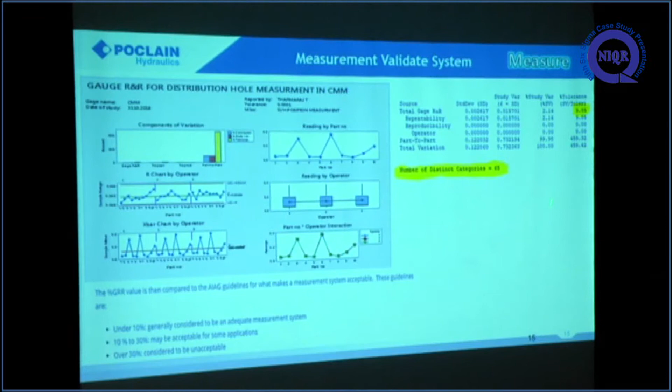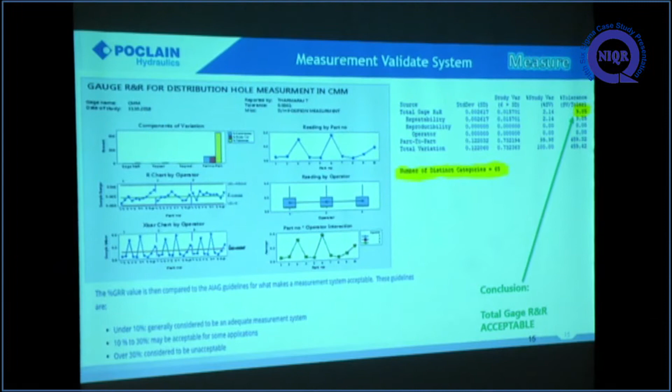This is the measurement phase. First, we did the MSA studies. Actually, we are inspecting this only in CMM. We did an MSA study with 3 operators and 3 levels, and the R&R percentage is 9.85, and for NDC we achieved 65. So the conclusion is gauge R&R accepted because it is less than 10%.

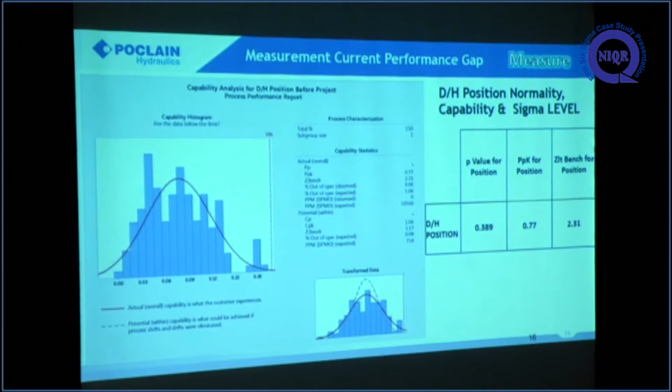And measurement of current performance: we are measuring where we are against the capability. We are checking the normality study. The p value is 0.389, and PPK of 0.77 is observed, as well as Z.LT long term capability coming to 2.31. So this is the fishbone diagram.

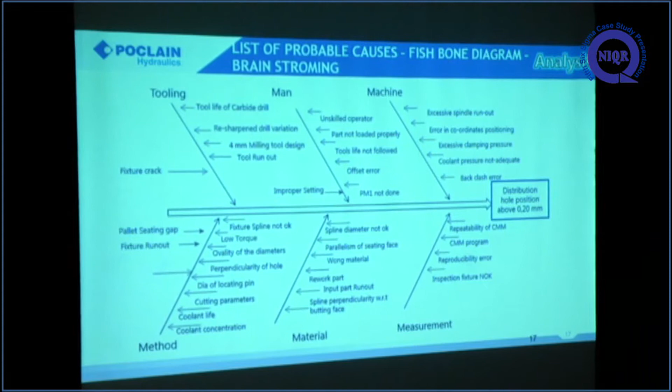In the fishbone diagram, we are capturing the measurement, all those things. Based on that fishbone diagram, through multi-voting, we are addressing the potential causes from those things to here. I'm giving to Mr. Ayappan for the next slide.

Here we have identified potential causes. One is improper setting, resharpening drill, variation, pallet seating gap, fixture crack, fixture runout, input part runout.

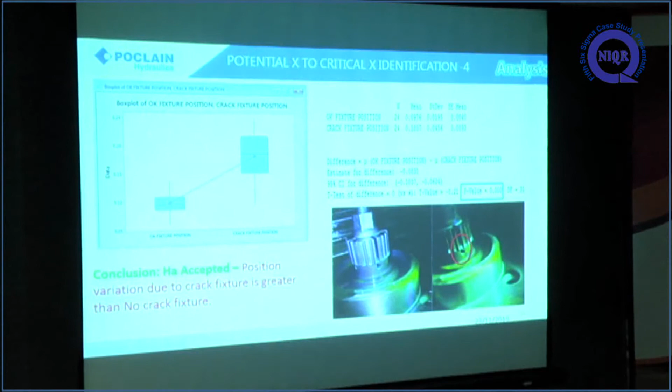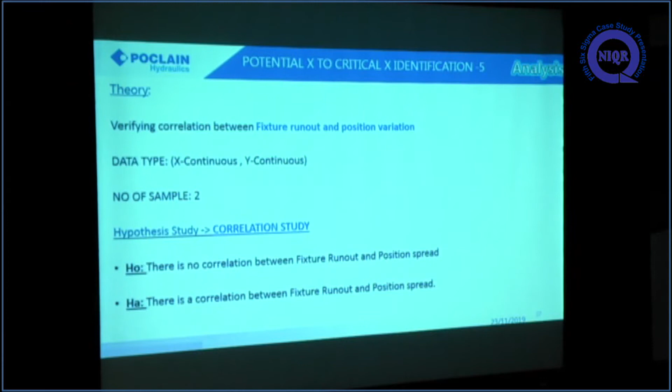Next slide. So position variation due to crack fixture is greater than OK fixture. Here we have taken a correlation study between fixture runout and position variation. The p-value is higher, so there is no correlation. So we have accepted no correlation.

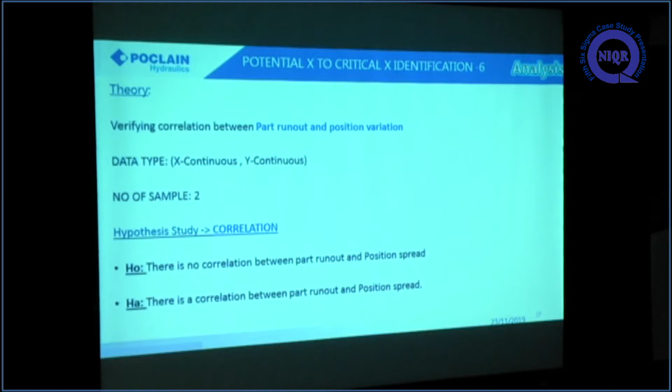Here again we have taken part runout and position variation correlation. H0: there is no correlation between part runout and position spread. Alternate hypothesis: there is correlation between part runout and position spread. Here also there is no correlation.

We validated 4 critical causes out of 6 causes. So to improve the distribution hole position, we need to act on the vital causes we identified. For improper setting, we did brainstorming with the team, and we selected the solution: a setting change check sheet and a setting change variation control fixture.

For drill variation, we did creative thinking by probing, asking questions to the team: can we minimize the impact of certain aspects? The selected solution was that drill radial runout control can be included for verification of resharpened tools. For the fixture crack, we benchmarked with other internal machines. The selected solution was a Hainbuch fixture. This is deployed and used in other HMC machines 2 and 3.

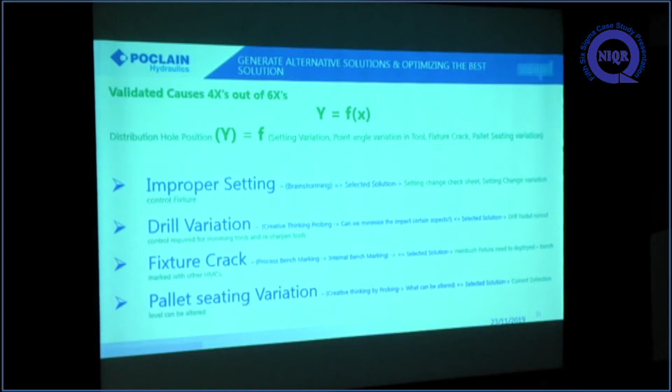For pallet seating variation, we did creative thinking by probing: what can be altered by this process? The selected solution was that the current detection level can be altered. Under improper setting, we made a reference block for setup of size 2 and size 5 block. This will avoid setting change rejections, rather than using two different pins, which gives more variation. Now this pin is connected once the setting is done.

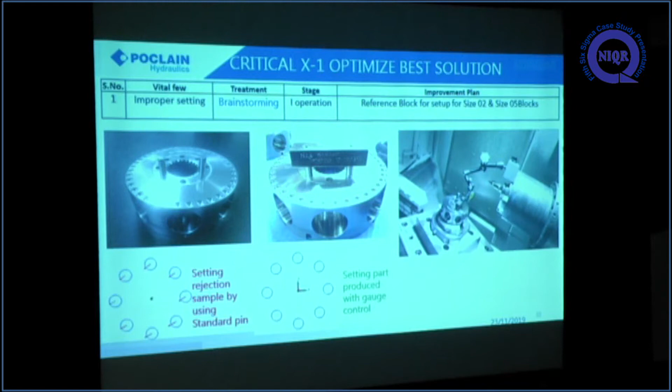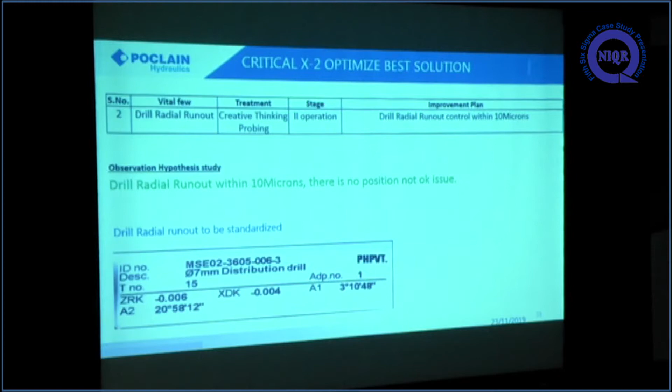Okay. So before setting up, it will be ensured there is no runout in this. Okay, next one. By producing with the two-pin method and with the setting block, we did a comparison with the CMM results. And the drill radial runout control should be done within 10 microns. So this covers the third and fourth.

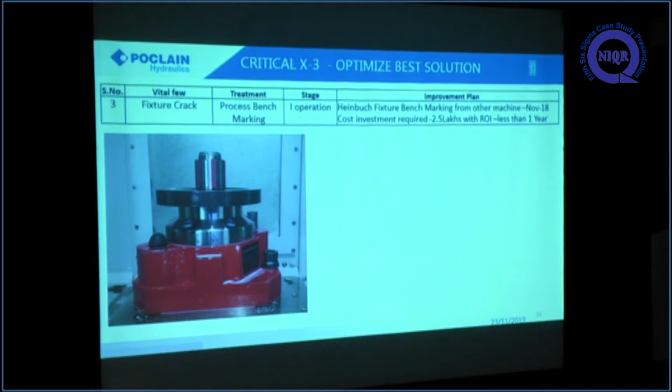So this is a Hainbuch fixture. In the existing fixture, we are using a spline fixture. So for the best solution for the fixture crack, we are using this Hainbuch fixture. The investment required is 2.5 lakhs. The ROI can be within less than 1 year. So next, the pallet seating.

These are the things we did for controlling the causes. For setting variation, the control plan was updated and a setting change check sheet was introduced. For drill radial runout, the control plan was updated and point angle verification was introduced. For the fixture crack, a new Hainbuch is implemented, but it was not inside the control plan. For pallet seating variation, the control plan was updated and a PM sheet was created. This is the control plan, with the points we revised related to distribution hole position not okay. Next, this is the check sheet we created for setting change approval.

And this is the pallet seating alarm. Every time, the operator has to check whether the pressure value is correct or not; he needs to ensure it at the beginning of the shift. After these improvements, we checked the long-term capability result: the P value is 0.389, the PPK value is 1.74, and the Z bench also increased from 2.31 to 5.23.